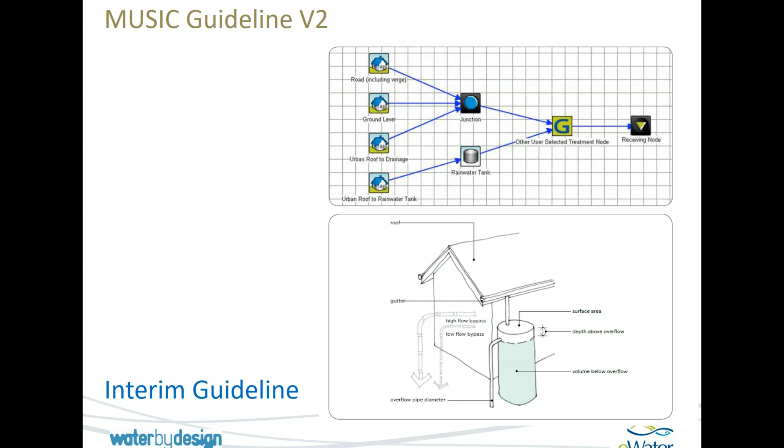So yeah, so we've basically refreshed the guidelines, and it looks a lot more attractive now. No sort of criticism of the past guideline, and looks a lot sleeker.

Okay, so one of the new features is, I guess the major change is a change to the, and this really came from research by the guys at Design Flow, and they've researched the water quality data coming off some of the wetlands up here in southeast Queensland, and they saw a trend that the wetlands up here were producing much better

concentrations. And so yeah, they've gone back to the original K and C star values that are defaults in the MUSIC model, and looked at the research there, and one of the things that it could be attributed to is the difference in temperature between the original default, which was based on a wetland in Melbourne, I believe, and the temperature difference up here in the subtropics. So with the warmer climate, the bugs in the wetland do a better job of breaking down the nutrients and pollutants.

Okay, so we've also just recently completed a street tree modelling study with the good folk at E2 Design Lab, and this study really aimed to model trees and optimize their performance to improve the health of the street trees. And so we've got some useful guidance on how you might model these street tree systems in MUSIC. So a little bit more on that later in the presentation though. Adrian will be running through the street trees.

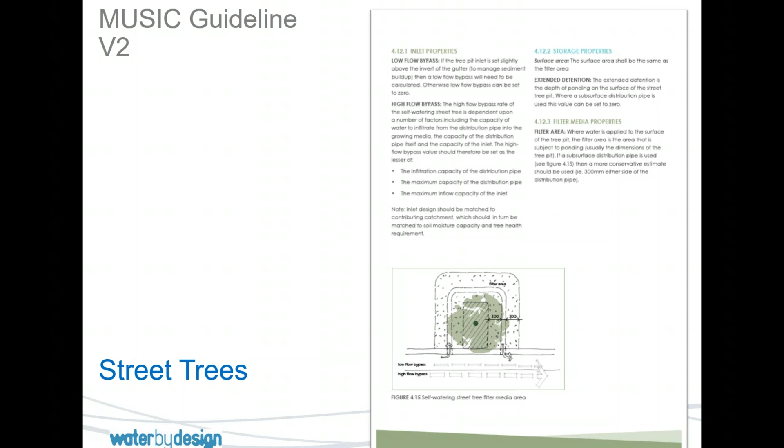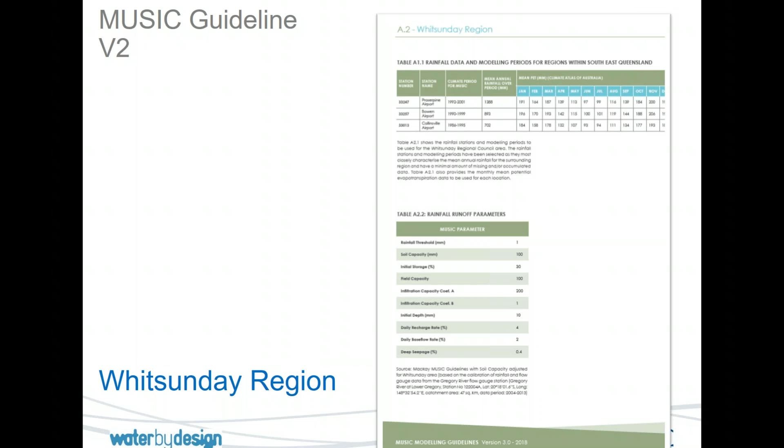Okay, now important to mention that this guideline update was in part sponsored by the Whitsunday Regional Council, and they originally requested guidance on the rainfall periods that might be used up there, and also the rainfall runoff parameters. So we've included in the new guideline a bit of an appendix to account for the sort of northern Queensland differences. Yeah, so that's the new MUSIC guideline.

And so we saw the need, as well as delivering water quality outcomes, to deliver outcomes that service the local communities, service the local ecology, and then service the economic needs as well. And so Living Waterways is broken into 4 components, basically water, environment, community, and economy.

So we've recently updated the Living Waterways framework, and one of the key elements in it is resilience. And so we've had a real look at why resilience is important for water systems and how we might go about incorporating resilience into your standard stormwater management plans. Okay, so what can we do to make these systems resilient? Actually, first, why is resilience important?

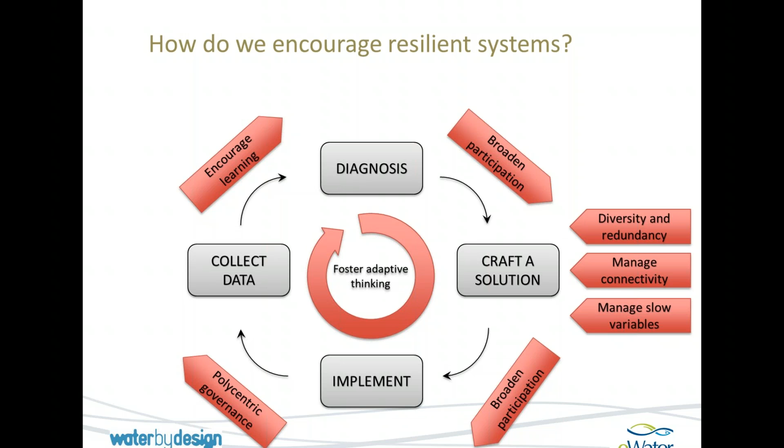Okay, we will move on to strategic planning. So another key element that's different in Living Waterways version 2 is strategic planning. And this is really recognizing that not all parts of the catchment are equal. In the CBD, you've got different pressures than out in rural landscapes. Just to give you an example, there's not much space in the CBDs, and there's a lot of people that can potentially benefit from public water features, whereas in rural environments, the reverse is true.

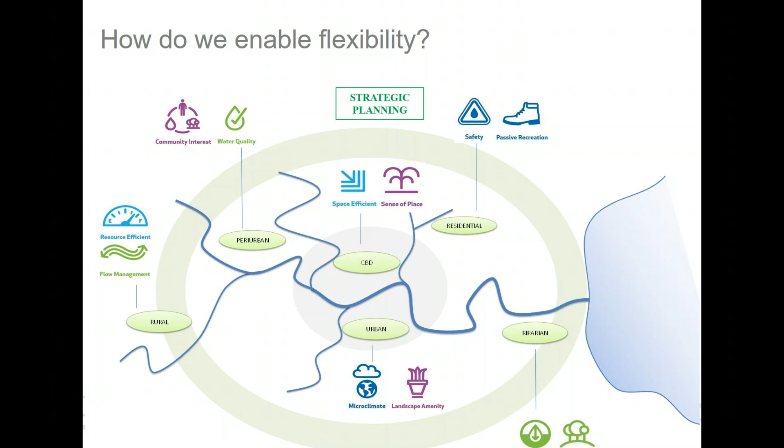So really, we need to think about what response we do for our WSUD systems and cater them to the local context. Okay, so strategic planning, we've built this into the new Living Waterways framework, by recognizing that the catchment isn't homogeneous, and so the risks that the waterways face are not homogeneous. You've got new developing areas where there's a high concentration of sediments and pollutants, and then you've got more established areas where there's less of a concentration, and then you've got natural areas as well where there's low to no

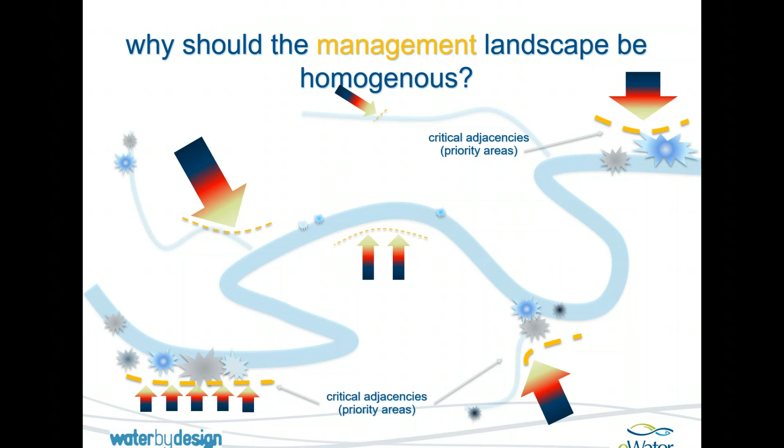concentrations of pollutants. And so really what the strategic planning module does is to allow WSUD practitioners to focus on these critical areas where there is a high value that aligns with a high hazard area. And at the same time, it allows WSUD practitioners to identify those areas where there might be a high value that is co-located with a high terrestrial value or a high community value or a high economic value. And so that way you can invest your funds in those links between the high value waterways and high value environments. And these areas are called critical adjacencies.

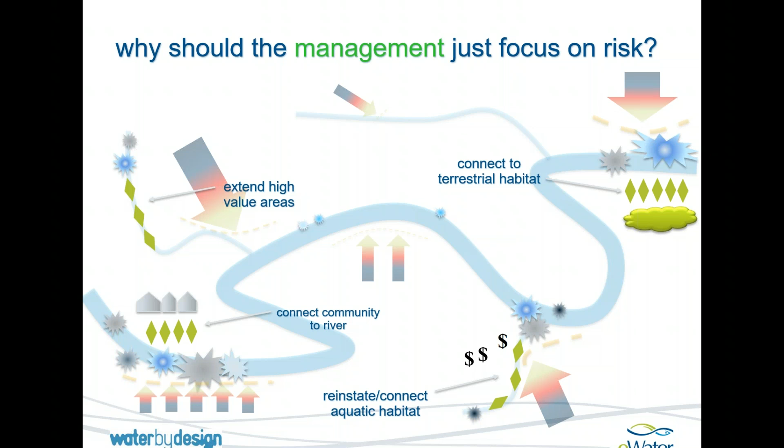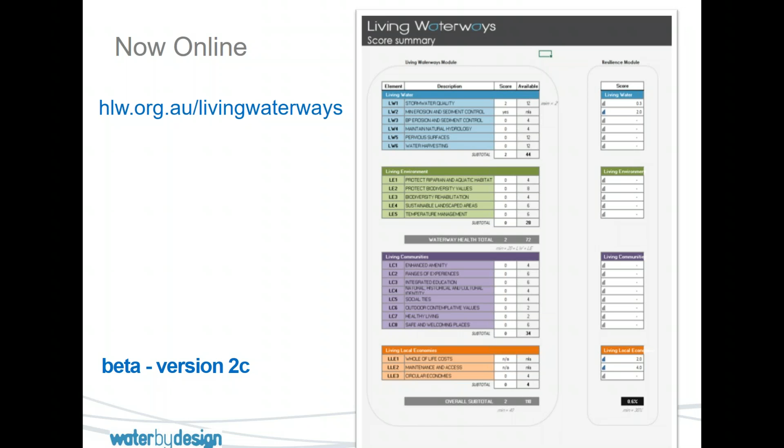Okay, so this new Living Waterways version 2 is available at the moment online as a beta version, and it's under that link. It's called hlw.org.au/livingwaterways, and you'll be able to go in and use it there. We are just about to release a proper online version, but I'll just talk you through some of the cool stuff that's in the beta version.

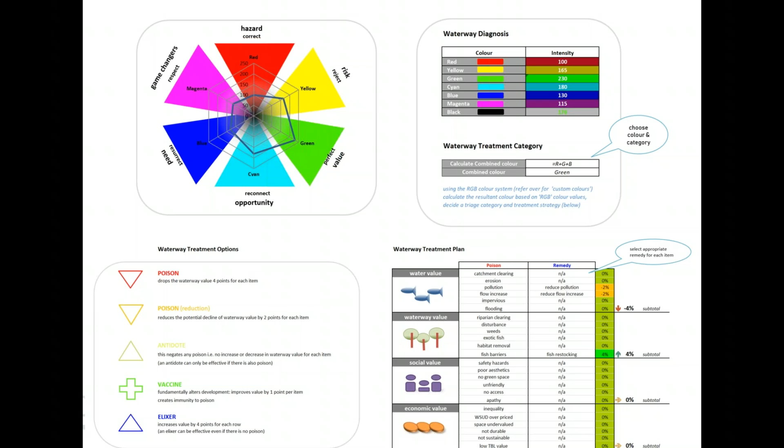So we've got a waterway diagnosis tool. So you answer a survey on what your waterway hazards are, what the current values are, and what opportunities are available. And it will help you diagnose what sort of treatment systems you might put in place. And so it evaluates the treatments on those 4 dimensions, so water, environment, social, and economic. And it can help you visualize how your waterway value might respond to those interventions. So some pretty neat stuff there. So we'd encourage people to have a look.

And this is a bit of a sneak peek at the new online version. So users will be able to go in and create an account and then fill out a questionnaire and evaluate how their stormwater management plan really ticks off on all those 4 key elements: the water, environment, social, and economy.

Okay, so I might pass back to Adrian for the street tree and wicking bed study. He has a background at Brisbane City Council in installing heaps of these trees. Okay, so thanks, Glenn. We were madly cutting holes in sidewalks and putting Aggie pipes in around the gardens to try and work out whether the trees would benefit from getting a bit of water off the curb and channel. Most of the trees did really well, so there've been over 200 rolled out at Brisbane City Council.

Now, when I moved over to Healthy Land and Water, there were obviously other people doing different versions, and there are proprietary versions. So we thought it would be worth getting in there and really having a look at how we could potentially write some guidelines and provide information for you guys out there. So we got E2DesignLab in, and they basically worked out the optimal size of gardens, the right soil types, and those sorts of parameters.

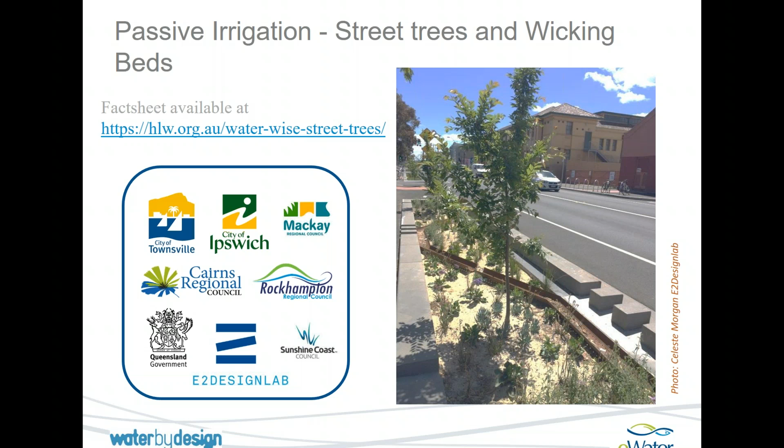What have we got? The benefits are really quite obvious, a lot of them, but they provide healthy growing environments. And what we have found with the new studies is there is definitely some additional benefit from putting in the sub-drainage or the outflow pipes, because if the soils around those gardens don't drain freely, then they can be waterlogged.

They give you alternative water sources to keep the maintenance of the gardens cheaper, and they improve the resilience of the gardens, of the trees. They improve local microclimates, so they reduce the heat island effect, and they also mean that you don't have to put potable water on the trees to keep them going most of the time. They help the downstream receiving environments.

I don't like to call them mini biopods, but the water does enter at the top and go through the sand and the soil system and then come out the pipe at the bottom. They don't use the same soils as biopods, and that's why we try not to think of them that way. The soils are put in there to support the plant growth, not to improve the water quality. So they do improve the water quality, but probably not quite as much as biobasins.

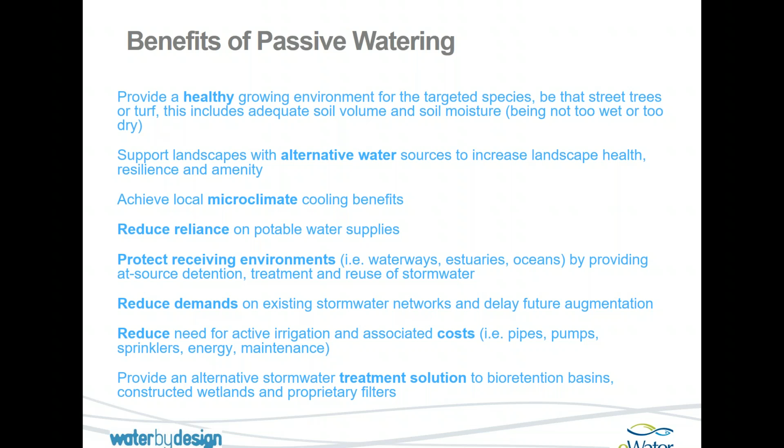So there you go, there's some pictures. A standard tree, what we were finding in Brisbane City Council, might last 10 to 15 years, and then because it had such a small area of soil to grow within, the roots became root bound and eventually stopped growing or even died. So if you add the right soil volume in, you'll get a lot more life out of the tree, and the tree will grow bigger and healthier.

So then we started with the Brisbane City Council water smart trees, and we found just getting that water off the curb helped those trees grow that little bit more again. And certainly there are examples all over Brisbane now where the water smart trees are outperforming the standard trees, or even those trees which have the right soil volume.

Now the bio tree does have that sub-drainage component to it, so if the catchment is sized right, and that's the other part of the study they've done, if the soil's right, the tree type's right, and you've got the sub-drainage in there, then you're certainly getting a big, healthy tree. And if you add those saturated zones in, then you'll get even better growth eventually, sort of like those self-watering plants in that last diagram.

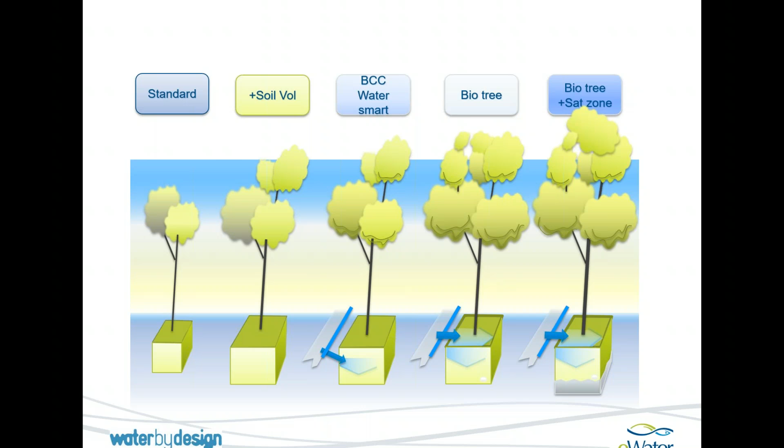So then we go on to passive irrigation. I mean, this isn't new technology. I've seen different versions of it around the place over the last few years, but it really is a neat way of getting that water to where it's needed and keeping it there. I've really worked a lot on stormwater harvesting over the last 6 to 10 years, and there are definitely merits to stormwater harvesting, and I believe these further enhance harvesting systems and are harvesting systems in themselves.

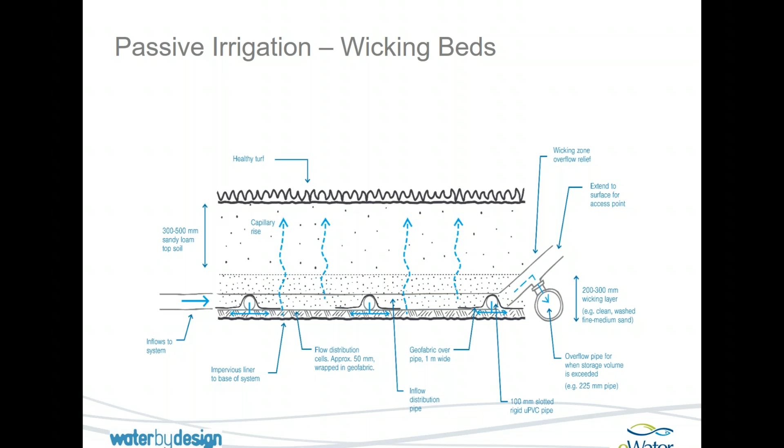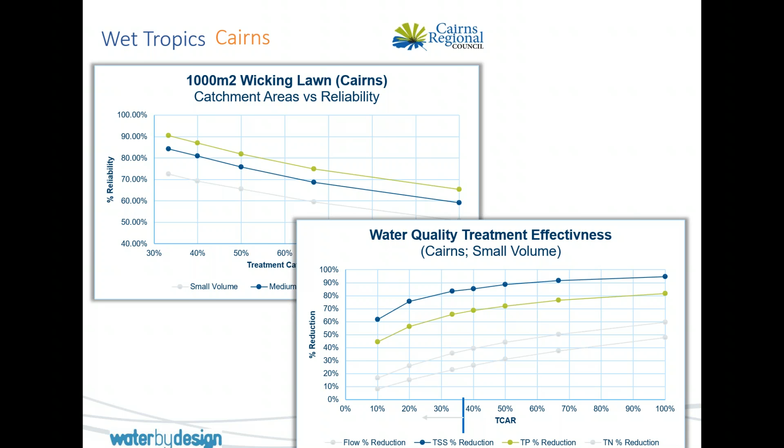Okay, so just a quick plug for a Water Wise street tree planting day. So we really want to promote this technology. We see it as low additional cost. You've got to put street trees in anyway. If you get in early while you're constructing a road, you can put the pipework in for just a little bit extra cost to enable these trees to be self-watering. So as part of the Water by Design program, we've got some funding to promote this technology, and we've got, I think, 5 or 6 councils on board to get involved in a planting day.

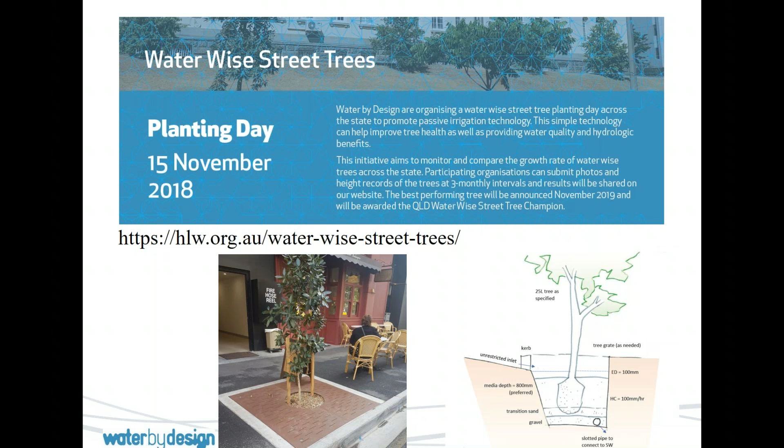So we're going to all plant on the same day, hopefully the 15th of November, and we'll be able to monitor the growth of these water wise street trees and compare it to control trees, and hopefully we'll get a bit of science out of it too, and see how the different climatic regions can influence the growth of the trees. And we'll look at 1 and 2 years down the track at awarding a street tree champion. So that's something that's coming up soon. And we'd encourage anyone in the southern states as well to possibly get involved if you like. We'll send you the details.

Okay, that's about us. Yep.

So just a bit of a wrap up. The 3 products to look out for: the MUSIC guidelines, that'll be early November. The Living Waterways version 2. There's already a beta version on the web, but we should have the proper online version in the coming weeks. And then the street tree planting day, 15th of November, is the critical date there.

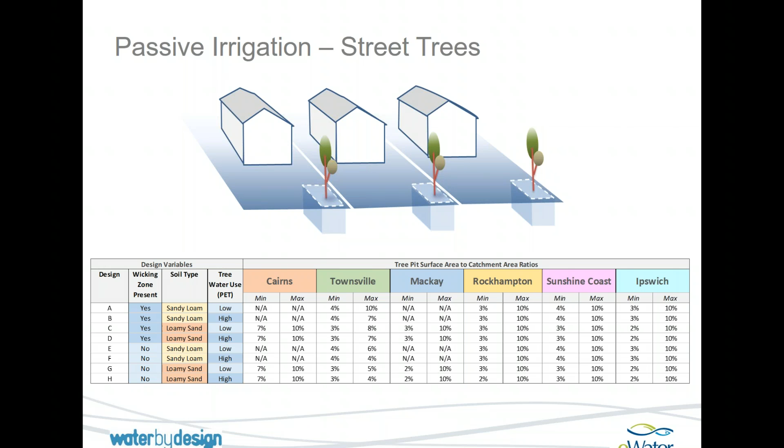This street tree trial that we're doing, we hope to uncover a lot of valuable insights into how these systems perform throughout the state. And if there's any councils in Dubbo, for example, that might be interested in putting in these systems, then by all means join our planting day, and we'll be able to see how these systems do in the drier regions.

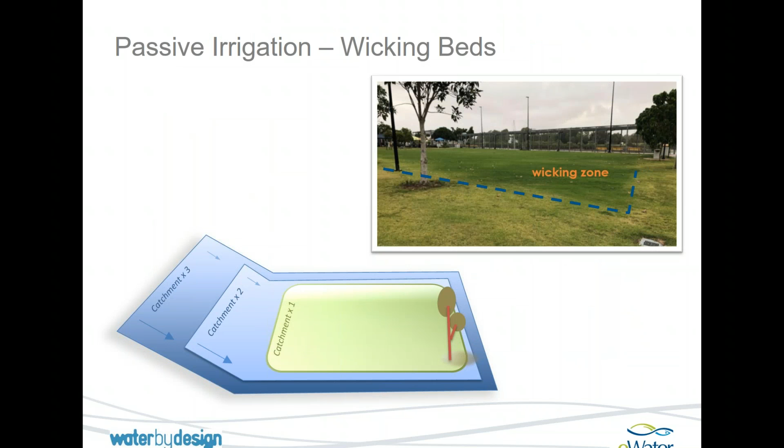Thank you very much for that. Now, also a question about the tree pits. There have been some reports that the tree pits can suffer negative impact from gross pollutants and total solids. So some councils have noticed that while setting up the tree pits, they may have some trouble with all the gross pollutants that gather on top of the media, or block the water pathway into the tree pit, and therefore the tree does not get the water that it should, and it becomes a bit of a maintenance problem for councils. Do you have some suggestions or ideas about that?

Yes. Okay. So in the ones that we put in Brisbane City Council, when they go and water the trees, they still have a maintenance regime for all of the street trees in Brisbane: they will put the hose that they irrigate the trees with into the pipe that's cut into the curb and channel, and really give it a blast of water. Now, not only does that push out the sediment and gross pollutants, but it also sends the water to where the tree wants it, into the root zone.

So if you water a tree on the surface, it tends to bring the roots up to the surface, so the pipes help draw the water down. So the way to help clean it out is to blow water through the pipe. And there's more than a couple of ways.